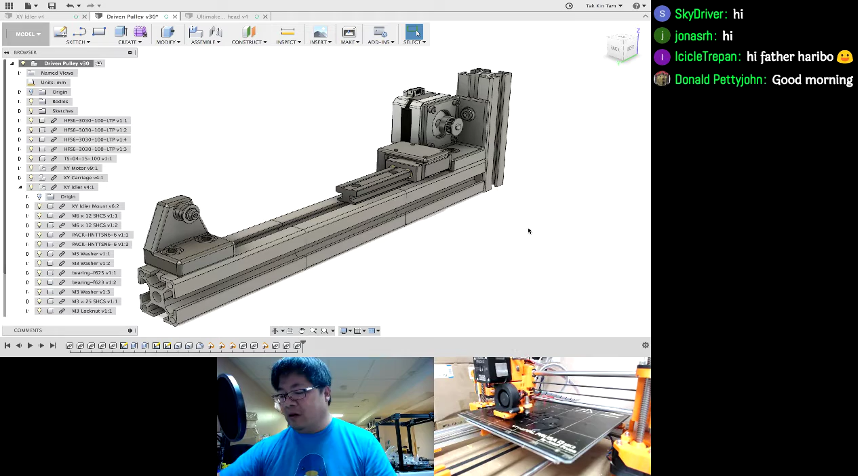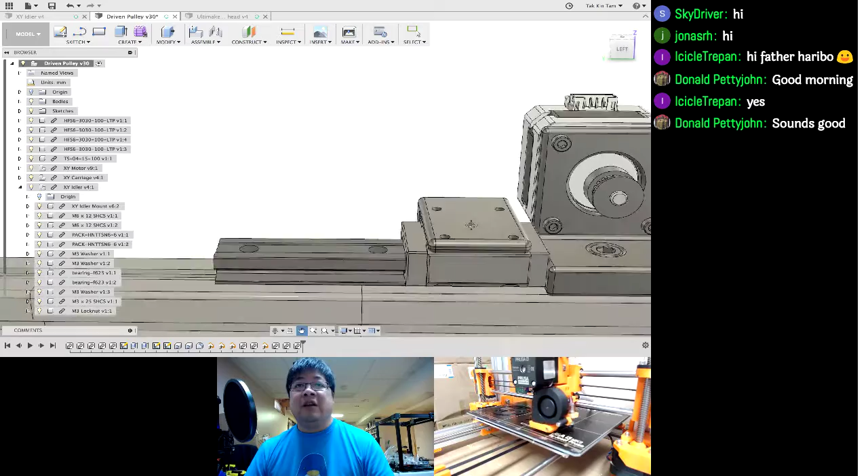So basically, nothing really big changed since the last time we streamed, just to catch everybody up to speed. Last stream we were talking about this motor mount here. We were basically going with a linear rail with the rod mount, the 10 millimeter rod mount coming out of the side here.

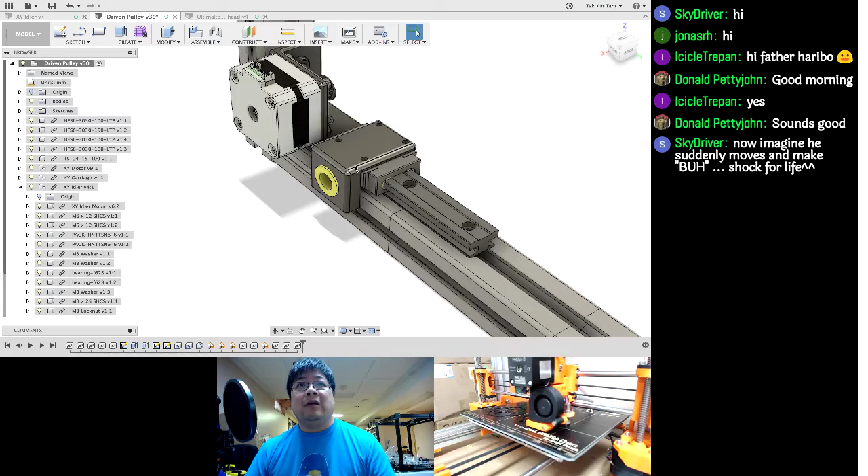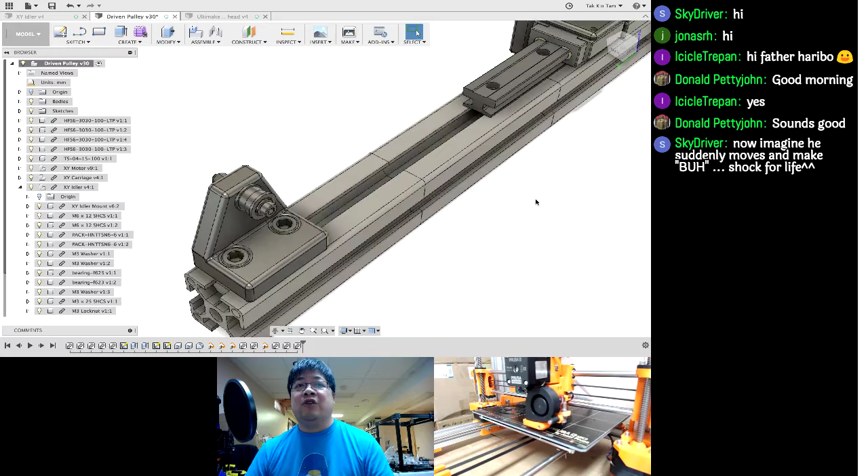We reviewed the usage of this motor mount in the last stream, and we needed an idler for the other end, so I finished the idler this morning. This is the idler design, simple basically, because from this side of the extrusion it's going to return the belt back to the motor. I still have to work on the belt mount for the carriage itself, which will happen today.

What's nice about this is that you could see it is a self-contained unit. You could take this whole extrusion, build the idler and the motor mount and the rails, before you bolt the assembly itself. So you could do all the tensioning and all the work off the frame, and not have to deal with trying to work around certain things.

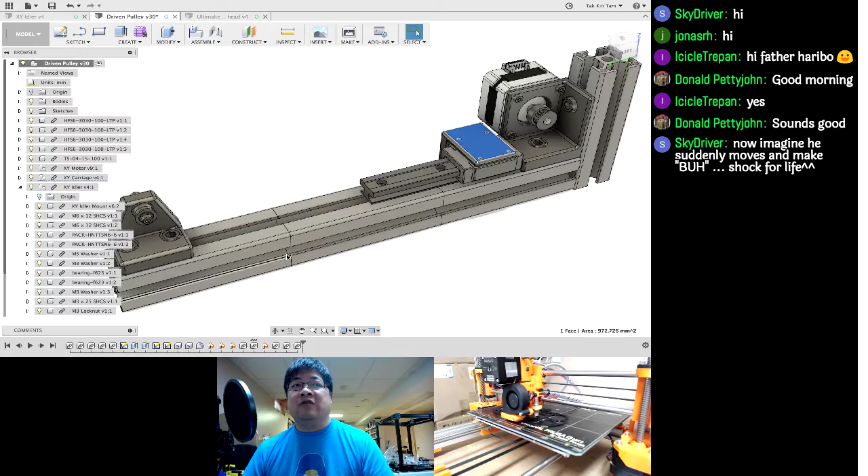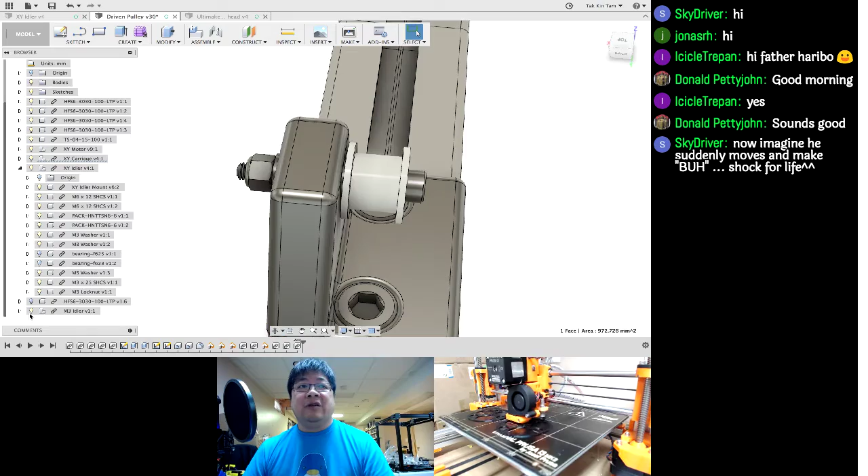The idler is designed for two flange bearings. You have the option of not using the flange bearings and going with a regular M3 idler, that works as well. But I personally like using the flange bearings because it gives you a little bit more freedom, and the movement is a little smoother. So I tend to use two flange bearings in that spot.

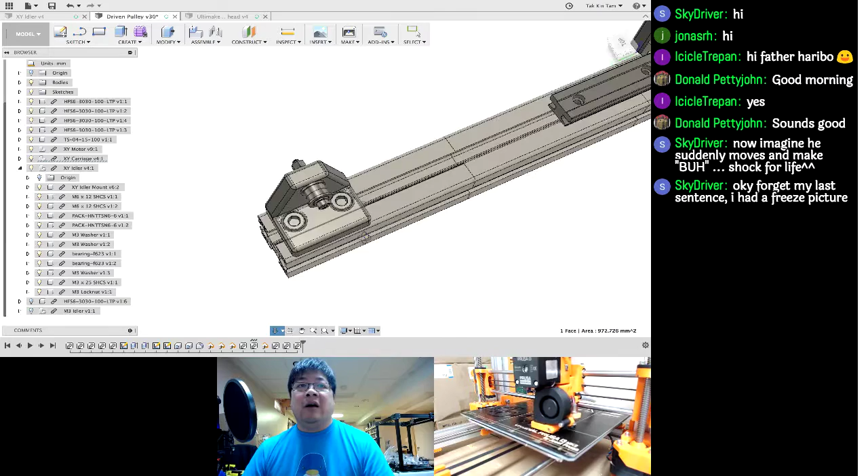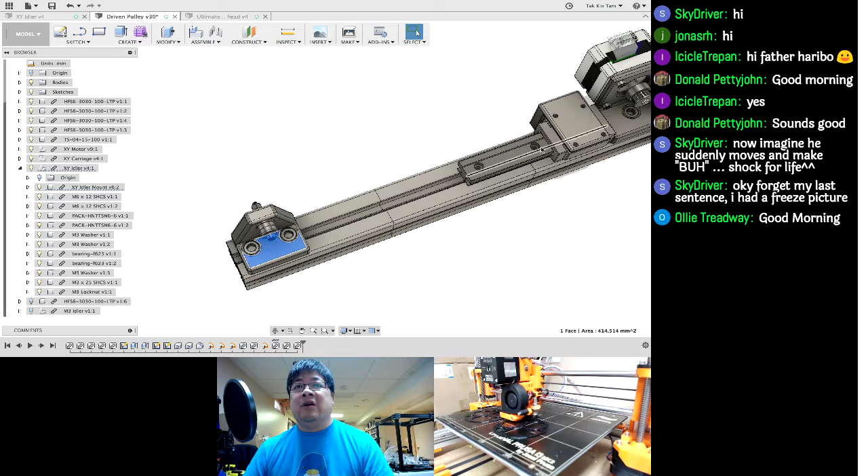The idler itself is, I would say, 35 millimeter long. We're leaving a 5 mil gap behind the idler so that you can move it back to tension the belt. So basically, the belt holder on the carriage itself is going to be a straight through belt holder, it's not gonna have any tensioning mechanism. The tensioning is going to be done by moving the idler along the extrusion track here to get the proper tension.

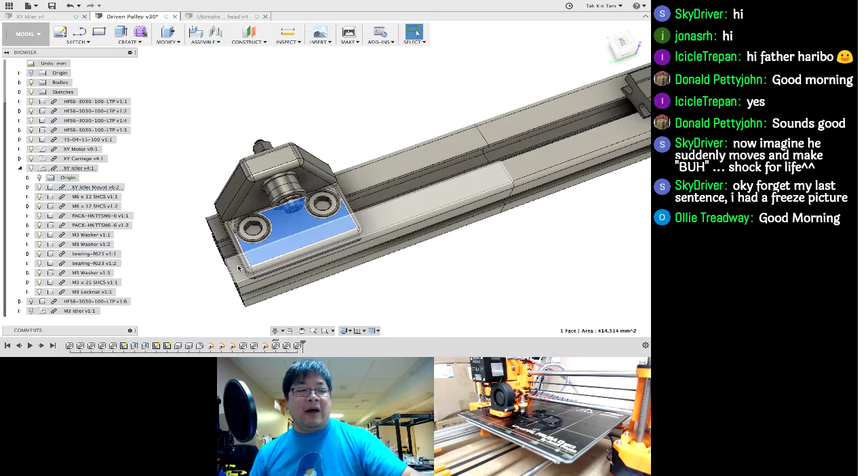Because the 5 mil, that's normally a GT2 belt - if I have one here, a normal GT2 belt, each tooth is about 2 millimeters in each step of the belt. So 5 millimeter is going to give you 2.5 teeth of adjustment. So you have the option of going with a little less, but then you lose the travel of the Y carriage itself.

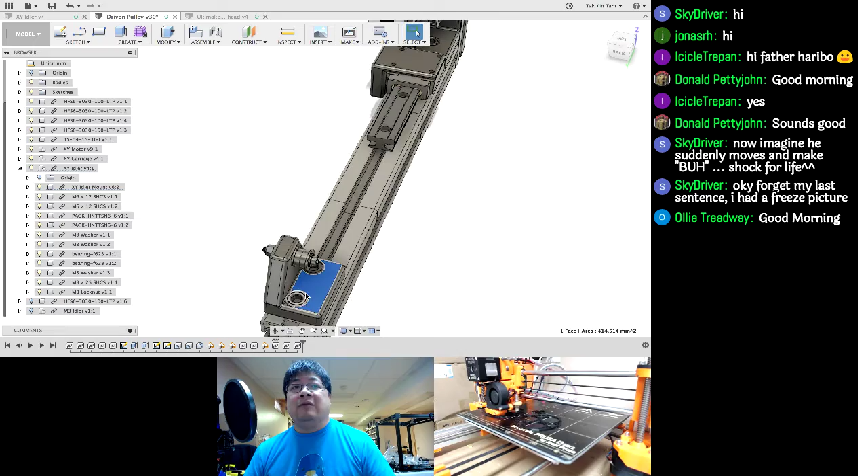So it doesn't take long. I mean, what you do is you go and tighten up the belt and move the tension back. So it should be pretty good, 5 mil should be more than enough adjustment range for that.

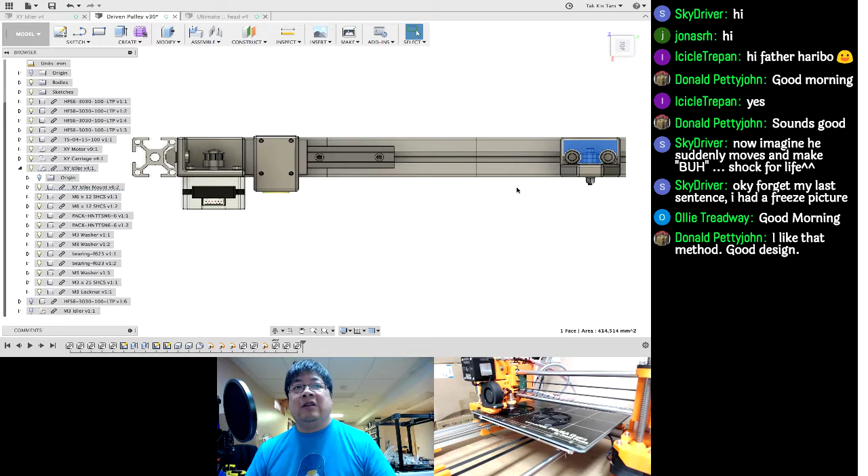So let me get the top view here. You can see that the top view is we're using a 30 millimeter or 32 millimeter stepper. So basically, the clearance of this area is pretty good, and the travel is going to be maximized for the entire length of this extrusion.

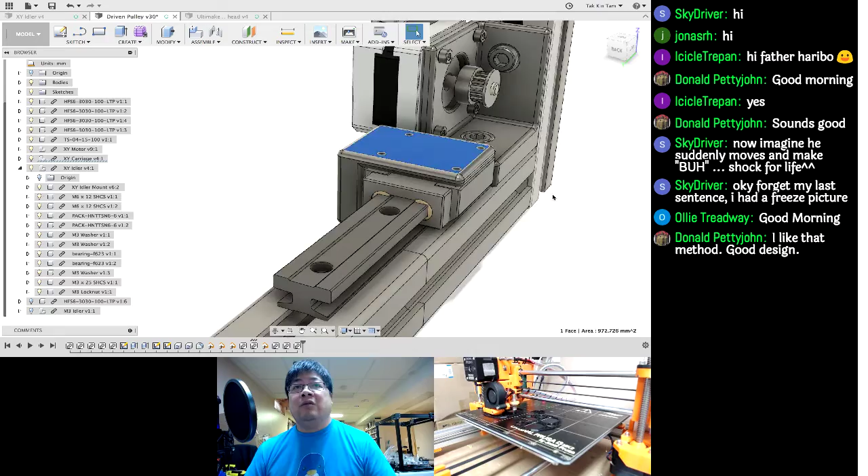So this is pretty much, I think, for now. The only piece I needed to make is the belt holder, and what's gonna also be needed, let me move it so we can see it in view.

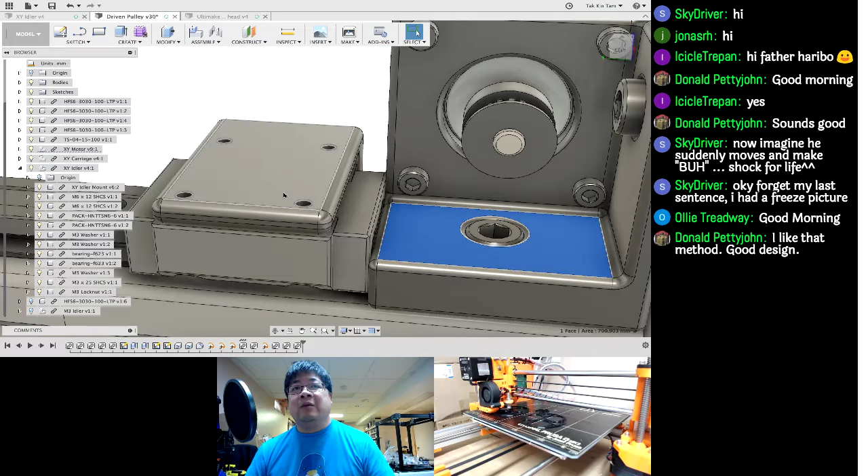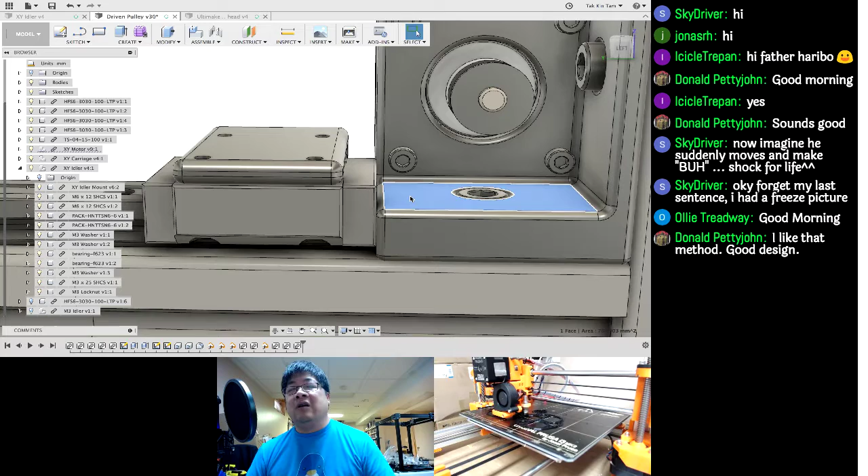What needs to go here as well is I need to extend this Y carriage mount to have a trigger arm so that I could put the end stop here. So basically, when the carriage gets to the end, it's physically going to be stopped because the carriage ends there and it's going to hit the motor mount. But I want to have it triggered before it hits the motor mount. So on the belt holder, we're gonna extend that so that the end stop sits on this edge here, and the carriage coming across is going to trigger the end stop so that it doesn't physically make contact there, hit the end stop switch.

On this side, unfortunately, we could have it, but it's more programming on the firmware to have a negative end stop for this spot, so we generally don't do that.

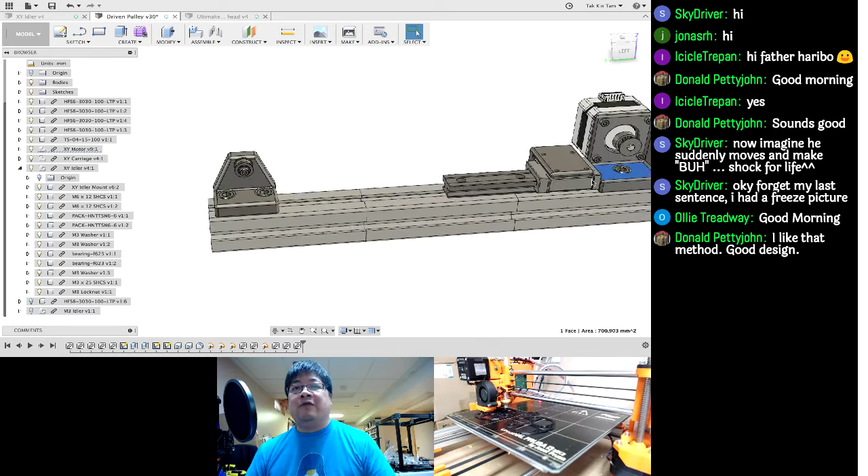What we do is after we home, we tell it what's the maximum travel, and then we have it stop slightly before this edge here. So even if you move it back to tension the belt, it will stop somewhere along this edge without hitting this mount.

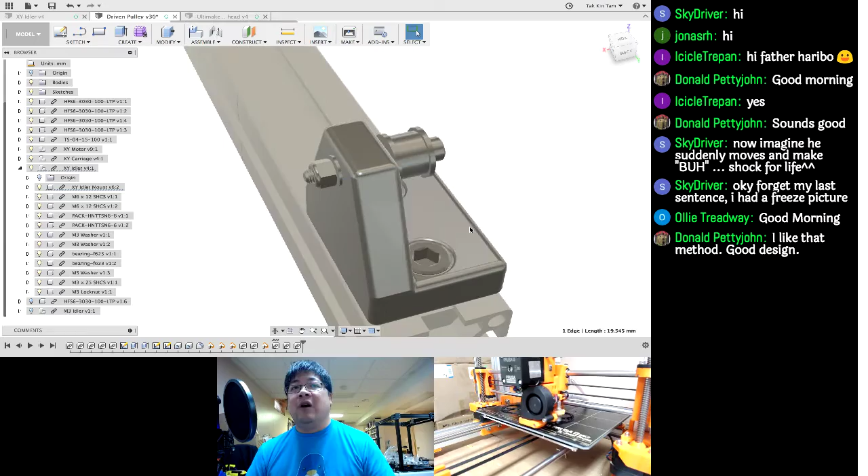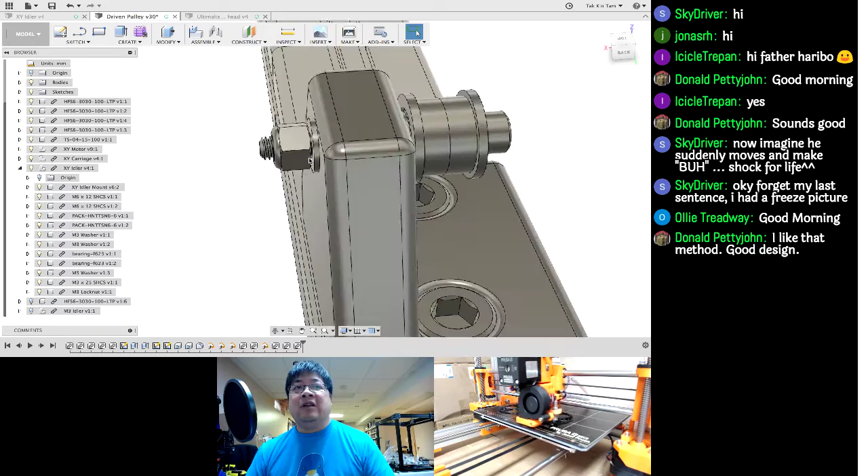Also, these parts are now designed with printing in mind. So on this side there's no nut trap, because having a nut trap made it more complex—we needed support to hold that nut trap in place, so it's exposed right there with a washer to mount it on. This edge would be the edge on the bed, so it's easily printable.

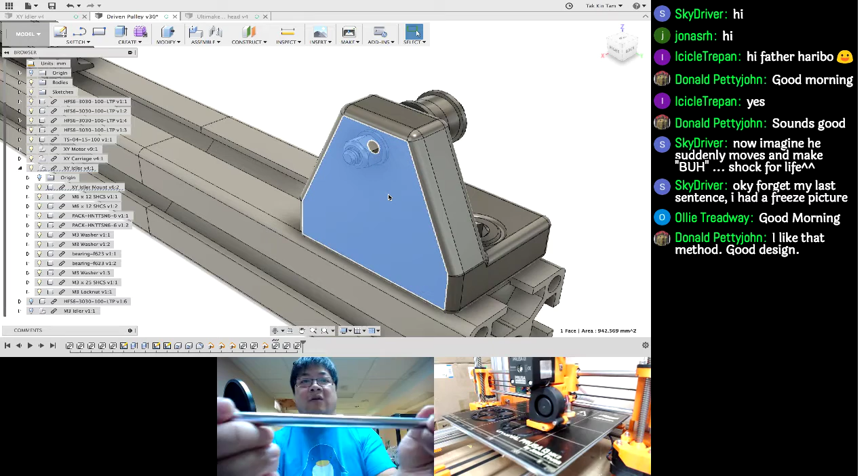This was the printed piece that came off the last print we did, and you see it goes into the Y carriage mount shown here. The 10 mil rod goes in there, and it's pretty sturdy. That's a 10 mil rod, so you can see how thick it is—there won't be any deflection in it. The spider rides on this rod, so it's pretty good. I think the design works.

These 10 mil rods I got from Misumi—I think they were like $12 for 4. This is 400 mil, so it's quite a bit longer than the ones we normally use.

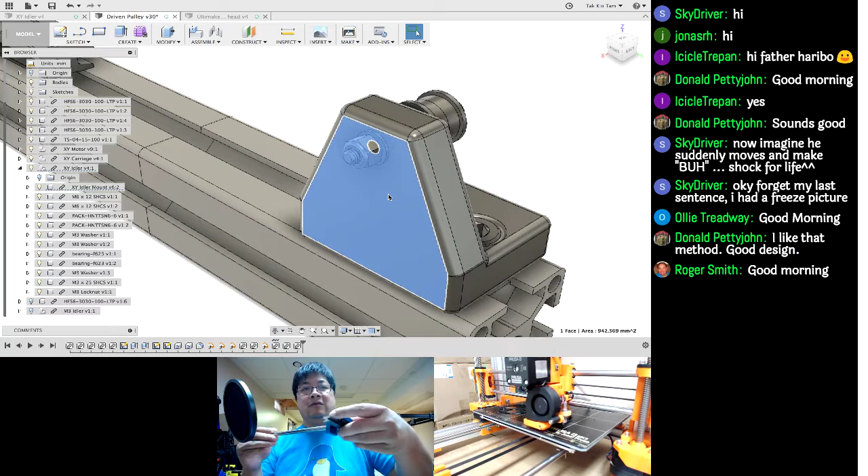It completely sort of rides along the rails there. It was looking pretty good. I think it's a lot simpler than the way Ultimaker uses the multiple rods. So I think that works.

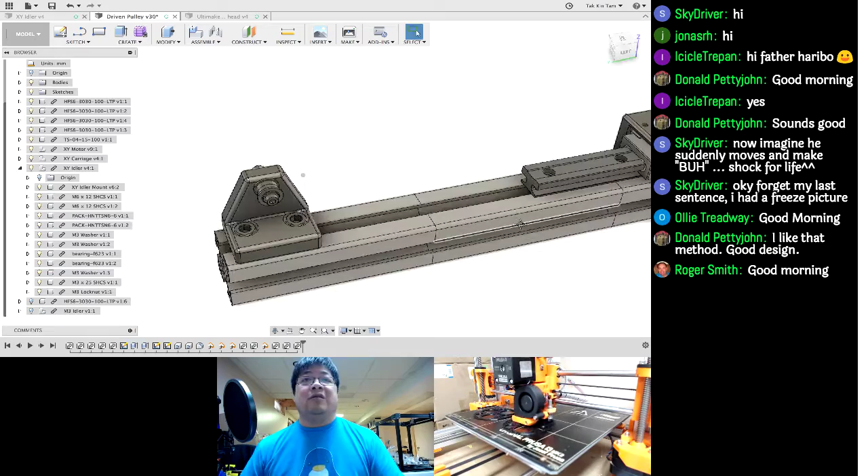By the end of this weekend, we should have this whole assembly ready to go. So if I make the belt mount, add the end stop switch to the motor mount, and then order the extrusion, rail, and carriage, we should have a working physical model next week of this kind of XY driven system.

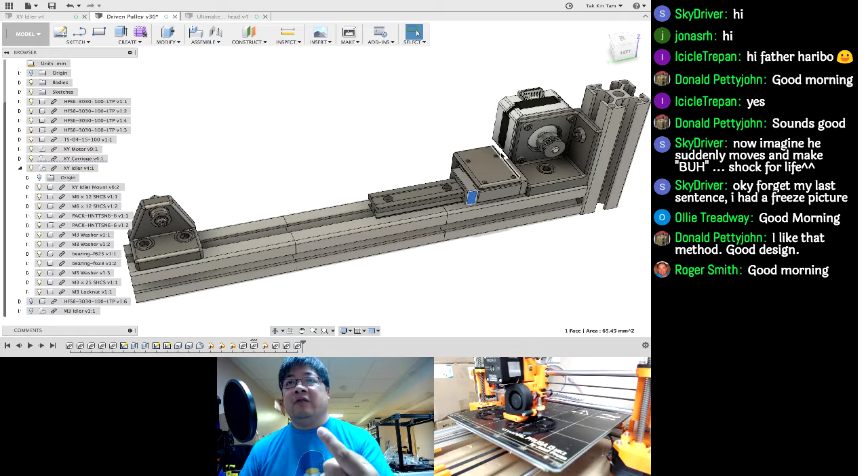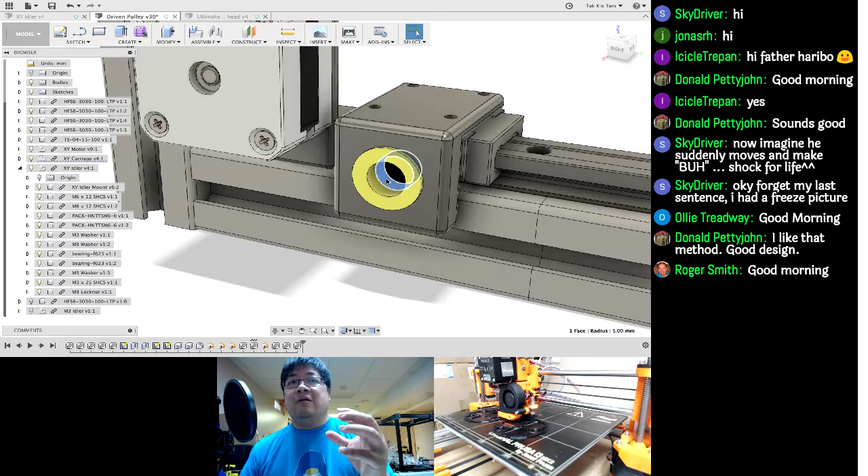Once I've built one and proven it works, getting all the clearance and stuff right, then I'll basically replicate it 3 times for the four sides, and then work on the cross rods. As I mentioned last stream, there's a sort of hack we're doing—because this is a 10 mil rod, and the outside diameter of an LM8UU is 15 millimeters, we're able to utilize the Ultimaker spider in place of building our own, so we don't have to reinvent the wheel.

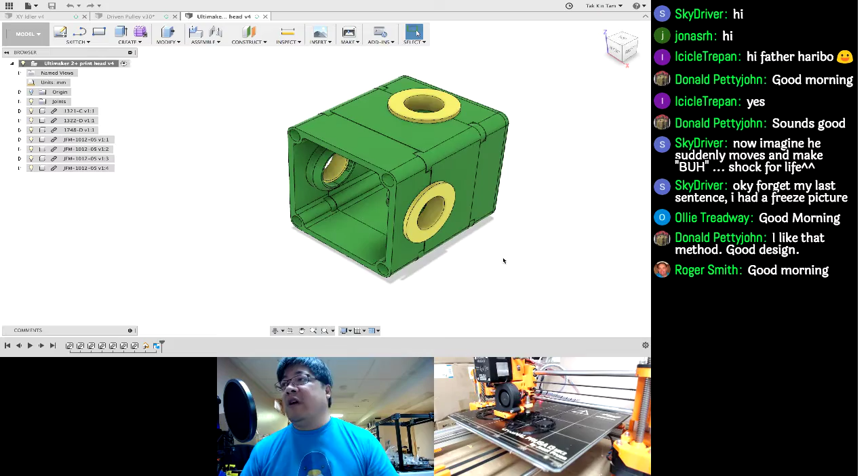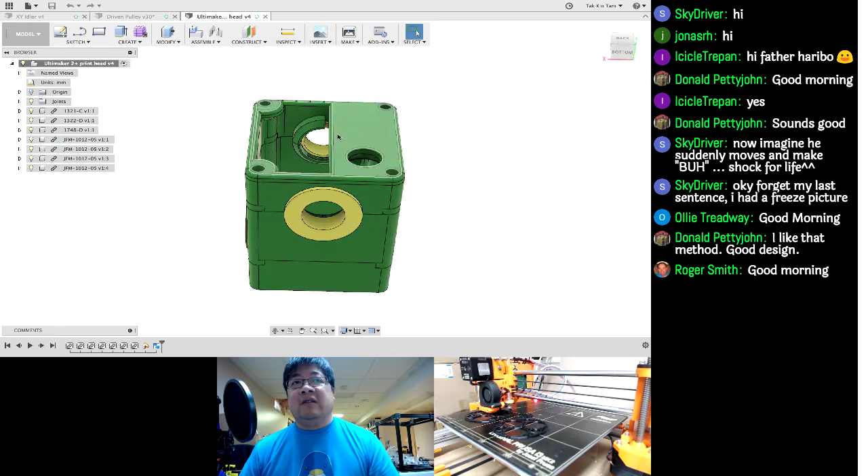So these are the step files I got off the Ultimaker 2 Plus, and on the Ultimaker 2 Plus this will be the orientation. They really have to fix this—there's really no easy way to do this. Basically, this is the top, where you'd feed the wires and the cross rod going to those bushings, and the bottom here is where you'd mount the Olsson block.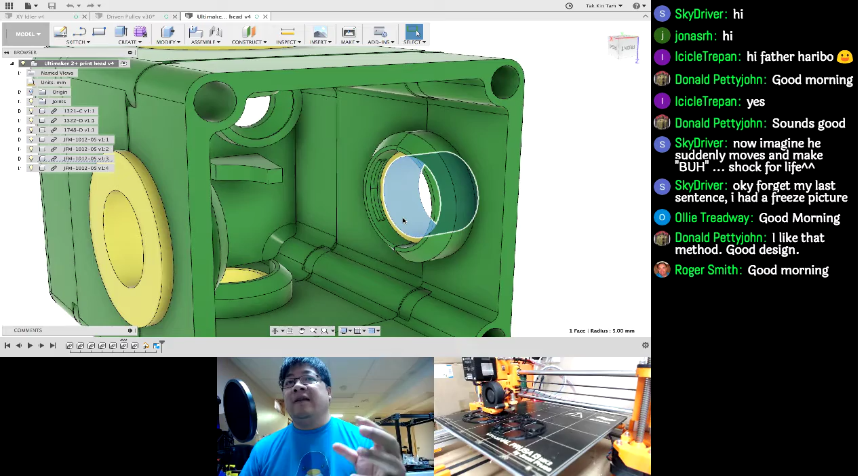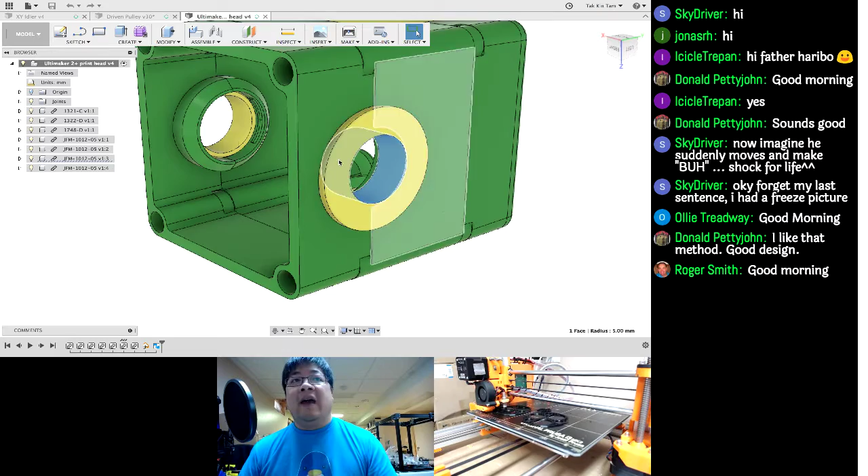So if I flip this, you can see this 12 millimeter OD, 10 millimeter ID bushing fits exactly in this hole, where normally you'd put an LM8UU or a bronze bushing across. It works in this spot. So that means I can adapt this hole to be a 10 millimeter hole, and have the cross rod come across here and the other direction.

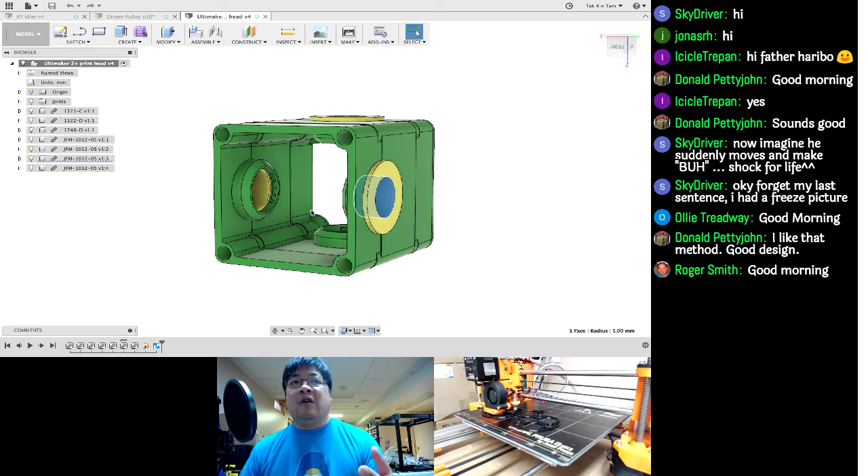So pretty much, if this proves to work, that means we don't have to build our own spider—you'd use the one from the Ultimaker, and then use all the different iterations of it, like single, dual, quad extrusion, E3D ones—all the different configurations you could use. You don't have to worry about making your own at that point; everything is already done for you. This is a good development that we're able to try. So at least for the short bid, we'll try to make it work with the Ultimaker spider, and that will save us a few weeks of mucking around with it.

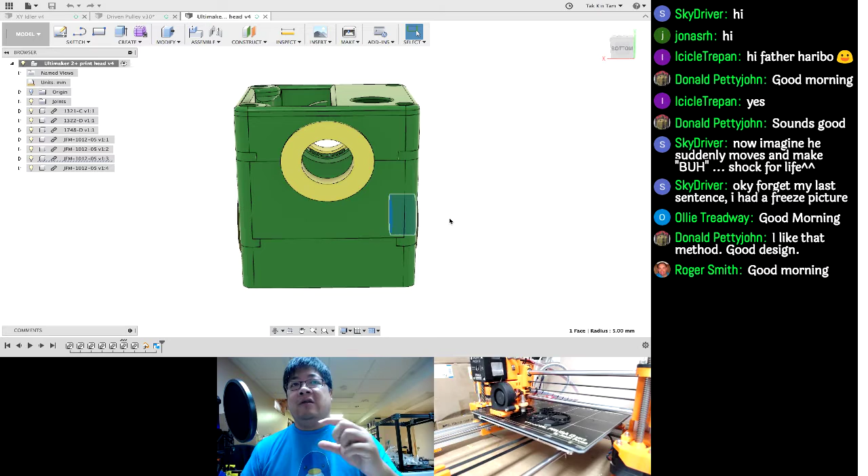In parallel, I would probably still work on a dedicated spider, but the option is given to you guys that by keeping the rod spacing between this hole and this hole at 18 millimeters, we're able to keep our options open.

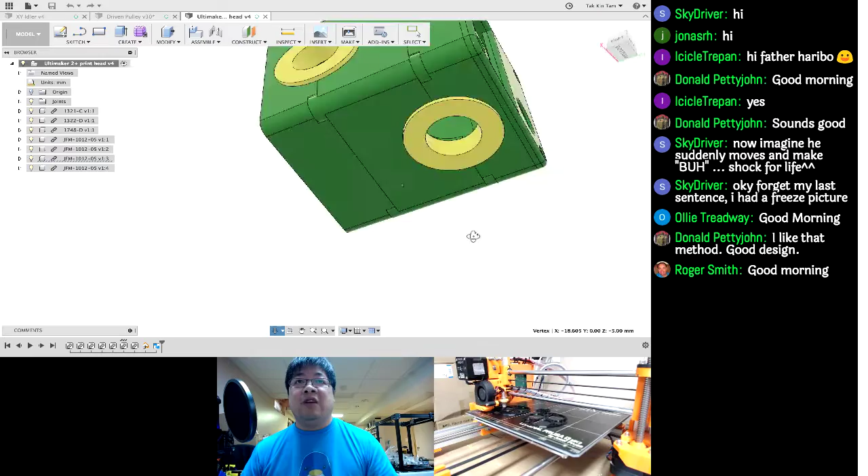So if this works or not, we're not spending too much time chasing the rabbit down. On AliExpress you can find these for like $14 injection molded, or you can find them for about $50-$60 CNC out of aluminum. So it's a good way to go either way.

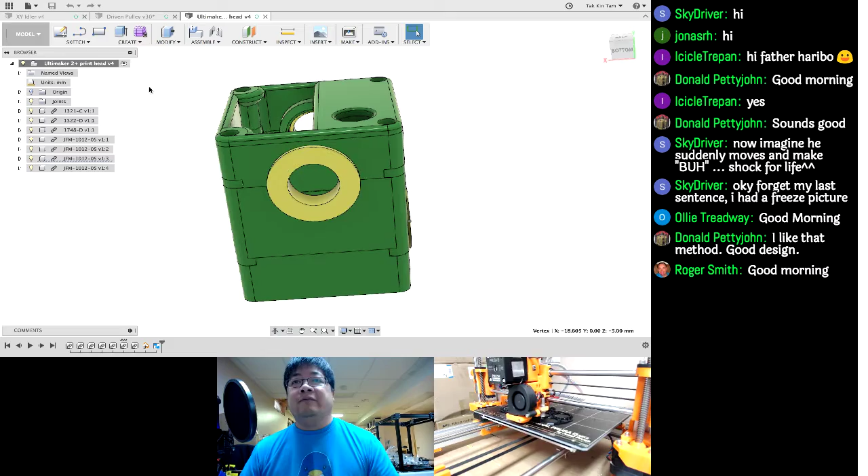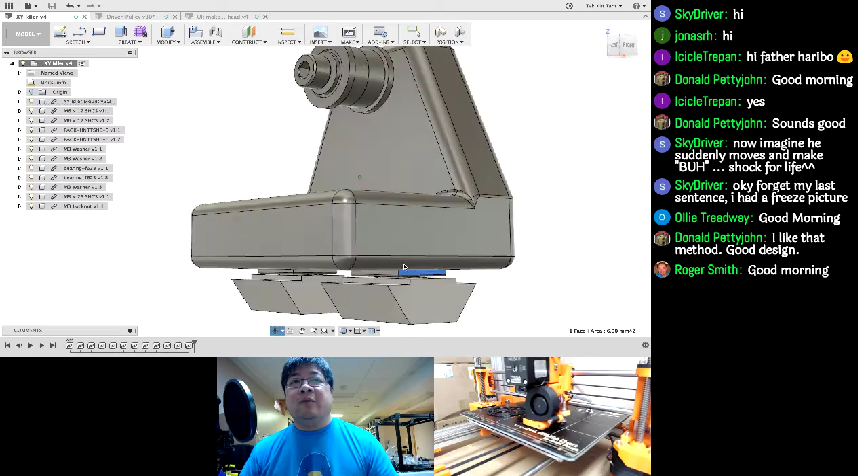This was an idler I was showing you guys before. This is the idler assembly where we put in all the hardware. You can see the alignment blocks are now integrated into the bolt hole, so they print nicely. You don't need support for these now, because the 1 millimeter is all you need to align yourself into the hole correctly, and that 1 millimeter also makes it a little bit beefier, so we're not having issues with people hulking these down.

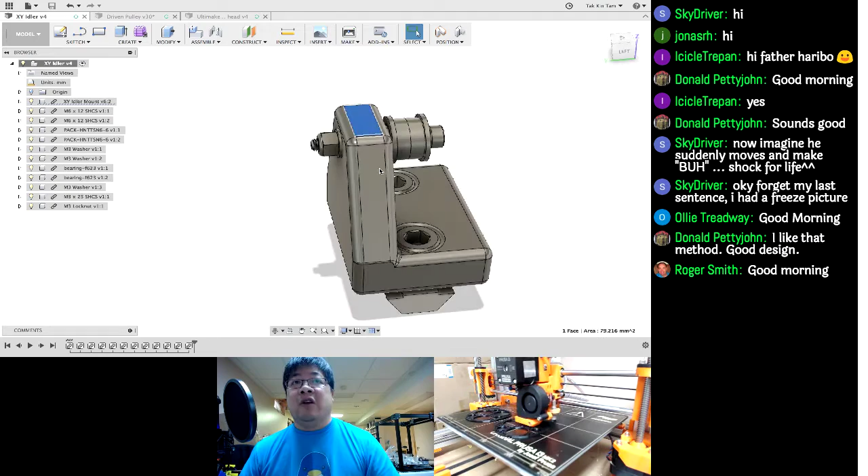So this came out pretty good. I did a loft on this, so basically I didn't have to draw most of this.

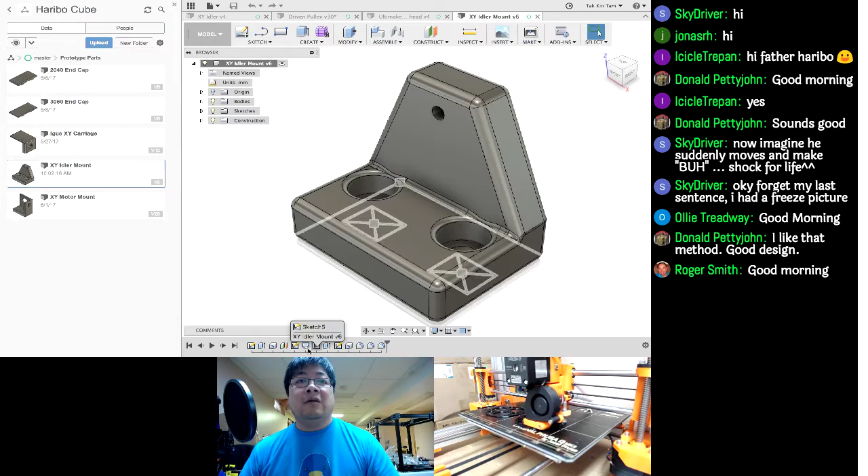It's basically a loft. I don't know if you guys have seen the loft before, let me see if I can bring it back up. So what a loft is, basically you define the base, define the top, and it'll create the sides necessary to transition from the bottom to the top profile.

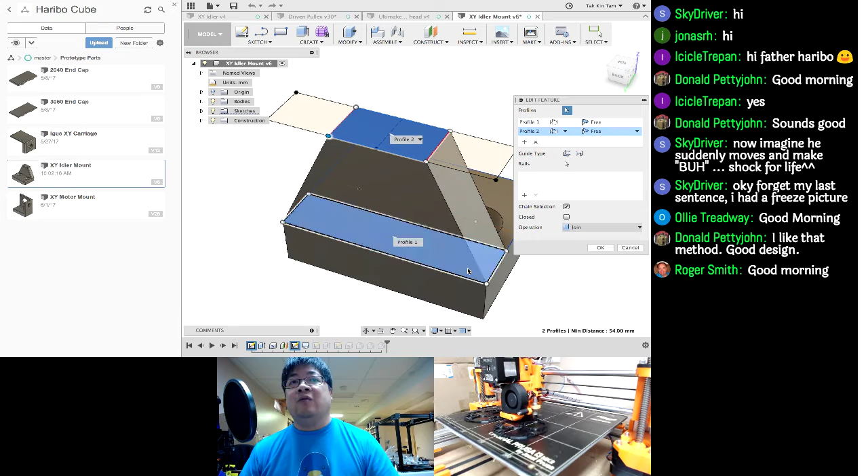You can stack as many profiles as you want, and it will draw the shape that's going to continuously connect all the profiles. By using that, I'm able to quickly adjust the height by moving the plane, and also adjust the shape so I'm not always square, which makes it an interesting shape.

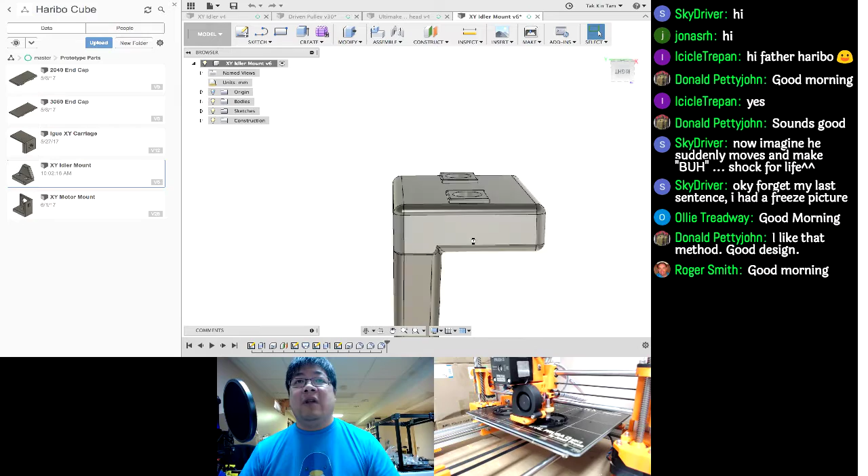So I'm gonna test print these today and see how it works out. But like I said, these alignment blocks with the bolt holes work wonderfully. They don't need support at all to print because it only comes out 1 millimeter, and there's a 0.25 millimeter fillet on it, so it brings it in pretty nicely. They don't really need a lot of support for it - you don't actually need support at all, as I say. So that was pretty good.

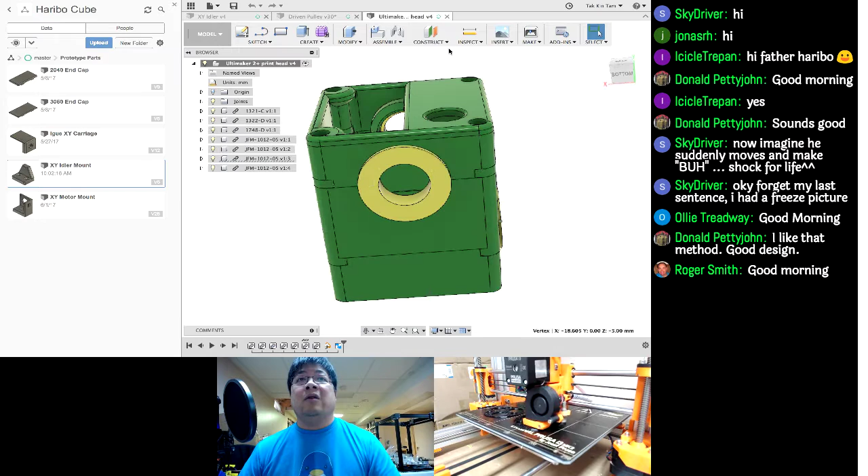We talked about this. We talked about this.

Let's save it. Okay, so that's pretty much all the parts for this week - the Igus XY carriage, the idler mount, and the motor mount for the XY.

If we're able to use the Ultimaker Spider, that completes the whole XY assembly already.

I think Patrick was having some good progress on the SmoothieWare configuration. I think he's rewiring his Haribo to use the smoothie board.

Oh yeah, hang on. So did you hear a lot of noise on this side? Because somebody's assembling a lot of the spinners that we are putting up. So they can see that now.

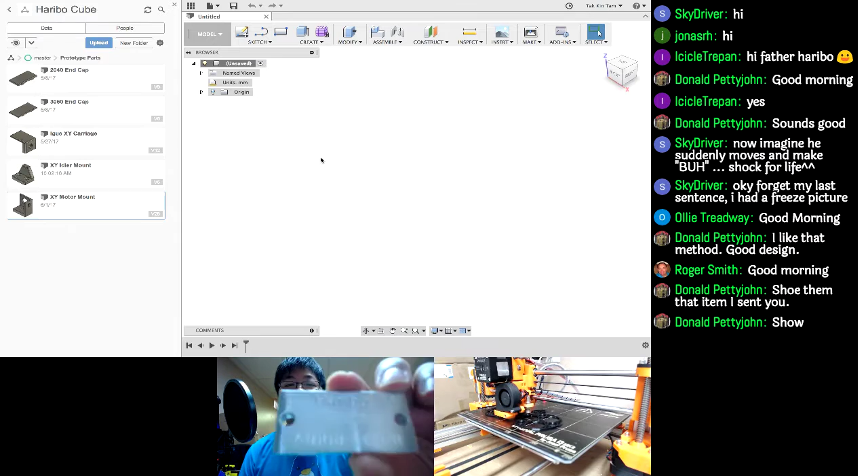I think that's better - Haribo Cube Alpha Team number 0. Donald was able to send me that. Thank you, Donald, for that.

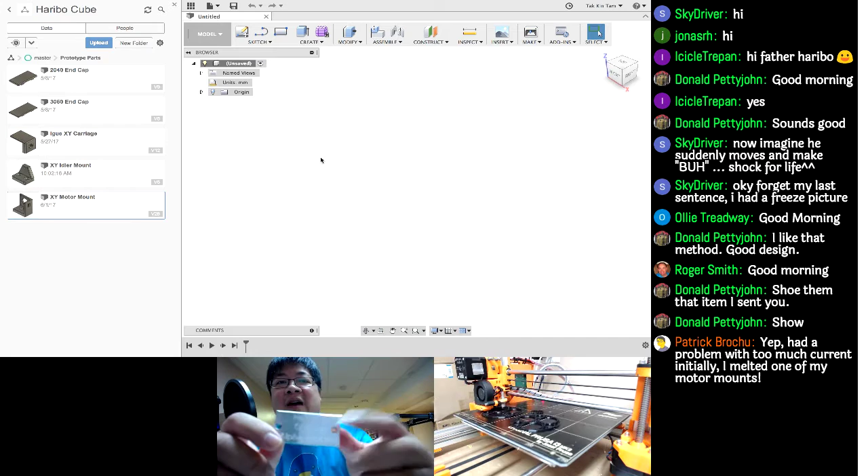Gives me a little bit of motivation to actually get the machine going so I could put the badge on it. I have the Haribo 3030 number 0 on the other printer that's printing now, the one printing the poly wheels, and this is going to be number 0 for Haribo Cube Alpha. We're going to have the badges for beta and then the one for the release.

So this is exciting. Next week I think we're making good progress - next week we're actually gonna order the parts.

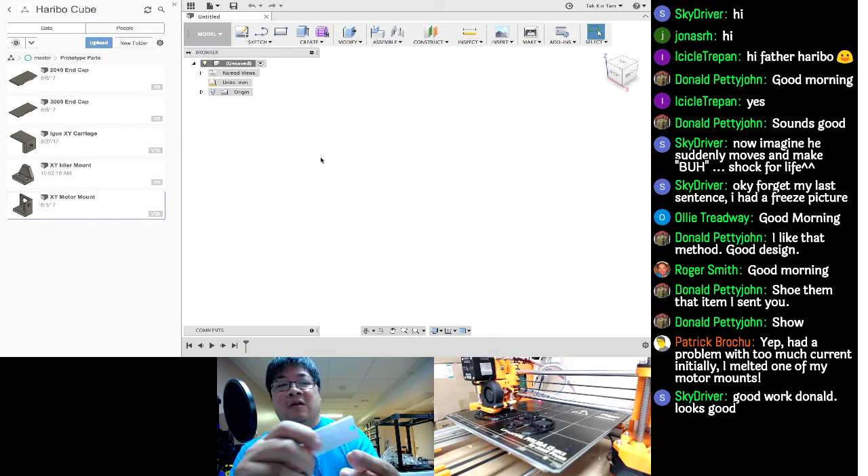I got the Azteeg X5 Mini and the X5 GT coming. The difference between the two, I think we talked about this last time, so I'm bringing it up so we actually see it while I talk about it.

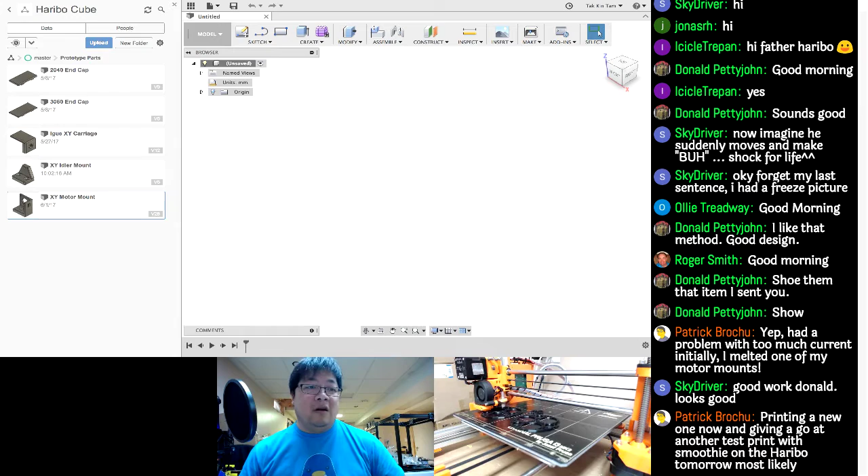Basically the difference is that one has 5 drivers and the other one has 4. So that's the major difference between the two.

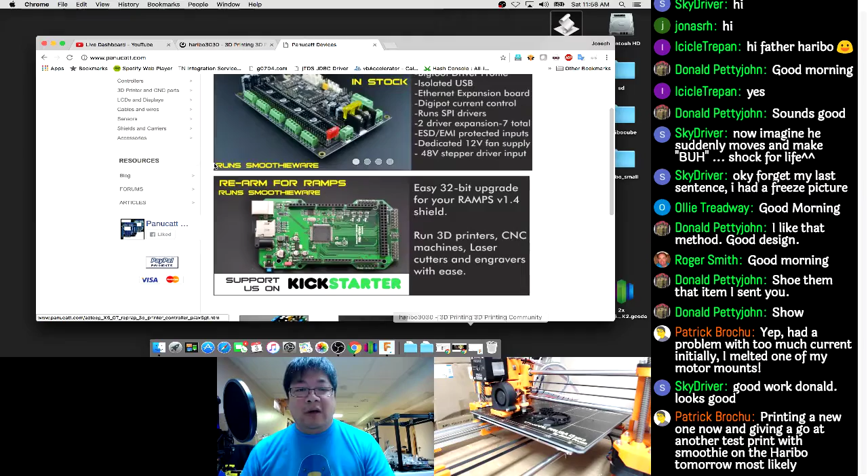So let's talk about the Mini first. This is the Mini, the X5 Mini. It has basically 4 drivers, so XYZ and E0 for the extruder, 2 dual MOSFETs, one for the heated bed and one for the hot end. It has onboard Ethernet, and Wi-Fi is optional on this one. It's a very tiny board, and you use removable drivers, so you could use the drivers from your RAMPS or whatever, or buy them from them.

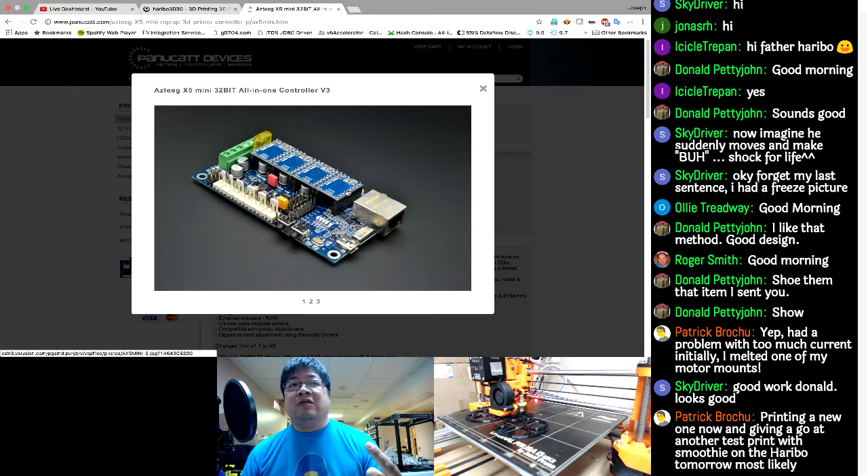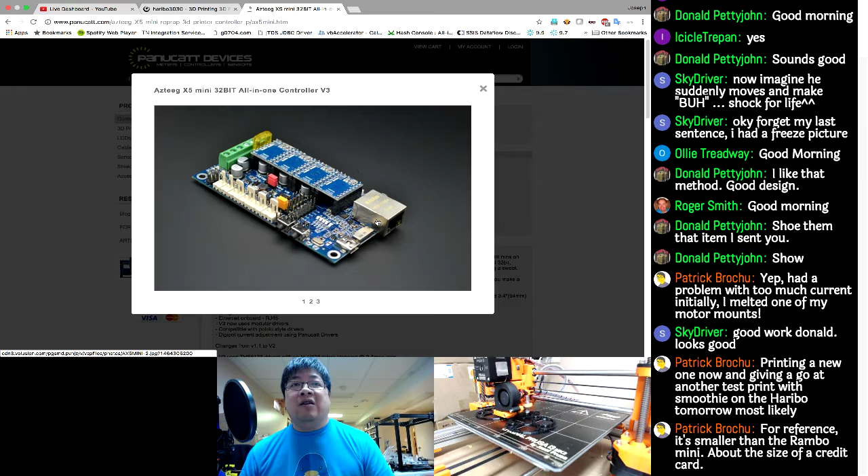I ended up buying the drivers from them. You can kind of get an idea how big it is - like if you look at this picture, that's the size of the Ethernet port. You can see it's tiny. The thing is really small.

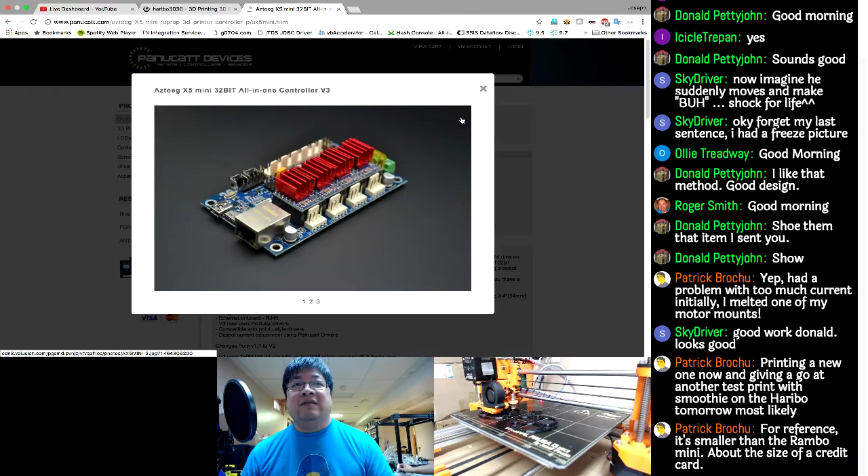The other one I got just for testing is the X5 GT. This one here, the X5 GT, gives you 5 steppers, so you're able to run an extra extruder motor, and it handles a little bit more current. Still, I think it's one hot end though, so you might have to kind of deal with that.

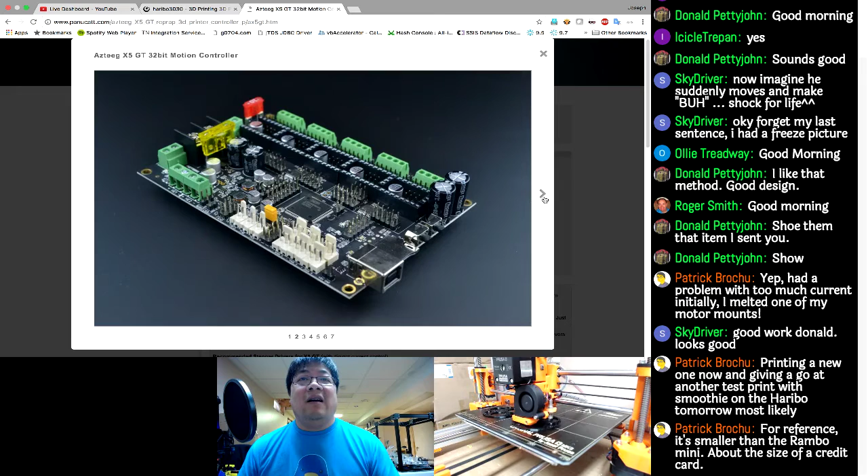Ethernet's not onboard, neither is Wi-Fi, so those are two boards you have to get separately. Actually, no - it has two hot ends. I just noticed that, hot end one, hot end two. So it supports two heaters for the hot ends, and that works pretty well.

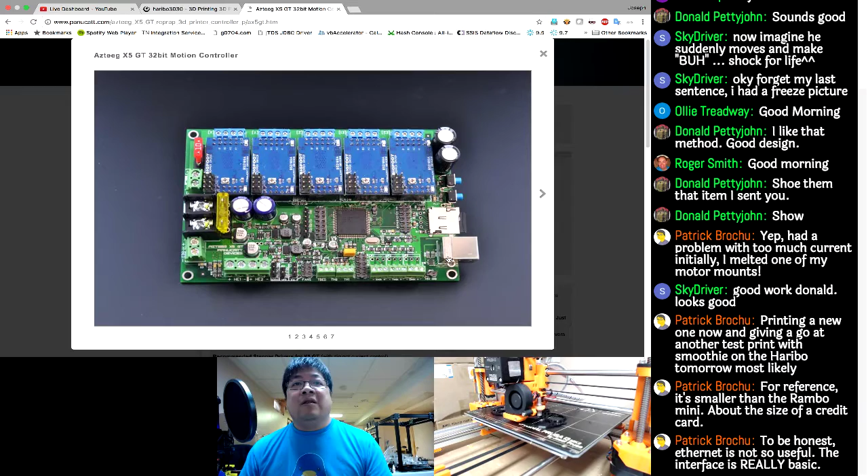For me, I'm probably not going to use the Ethernet myself. I'm still going to be printing directly from the LCD, so the SD card is from the LCD. So that wasn't really that big of a deal, but I did get the module anyway, just in case I needed it.

And I picked up the Viki 2 - I picked up two of these Viki 2 displays because I like the fact that it has the red and blue that light up, so I could glance at it and figure out what it's doing. And the full graphic display is really nice, so I ended up getting that as well.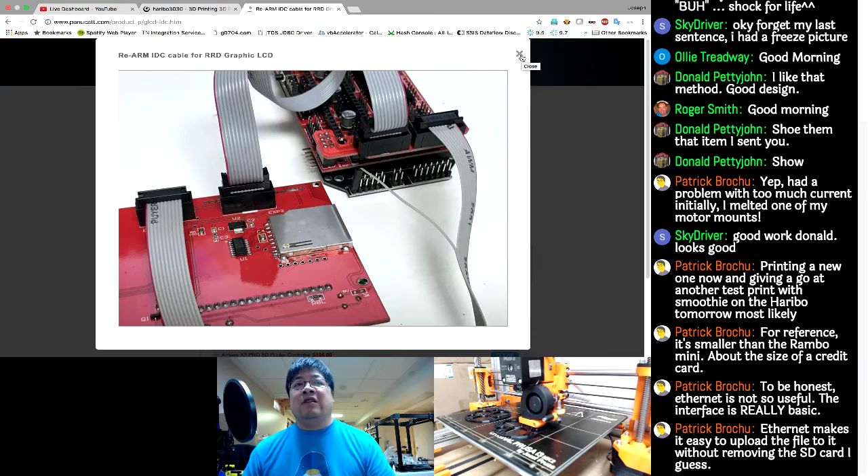I'm hoping that I have different ways of doing it, but like I said, you don't have to get - I think I mentioned this last time - you don't have to get the LCD. You could use this one, which is a $1.50 cable, and that allows you to use a cheap Chinese display. It won't use a smart one - you have to use the full graphics display. So there's two different ones. We'll test that once it gets here.

I think it ended up being 480 US for the two boards, the two displays, and then a bunch of other stuff that I got, like all the drivers and everything. Then I just got a notice on DHL - it's going to be like $80 to pay for the customs. Not really happy with that, but at least it's going to be here in like 2 days. Not sure if Patrick had to pay any customs on the order from Panucatt.

So what drivers - there's a few drivers that they were using. This is the X3, so let's look at the X5 for a second. Yeah, it's like $80, I was like, what the fuck dude, I wasn't happy about that. Guess you guys can't really read that - SD8825, based on the TI driver 8825, robust and runs cool, 1/32 micro stepping, 2.5 amp, 40 volt max, good choice for heavier motors. That's the one I went with.

Some people were using the 5984, the Allegro one, because they like it for the fast decay feature. I'm not sure - I talked to Leslie about it, and he basically recommended I get the TI one, so that's what I did.

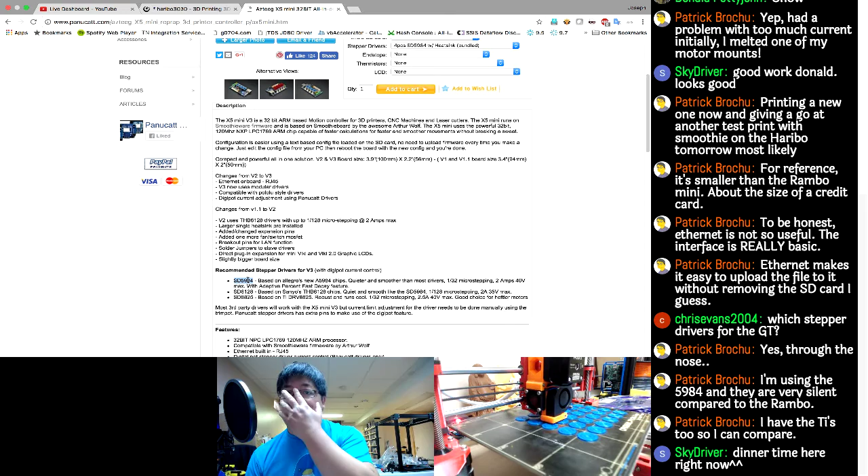What else? I'm aiming to restock the MK42 clone board by end of next week, probably Thursday or Friday. There's been a lot of demand for it. It seems like after we came up with the flatness test, there's some demand for them now, and I think the people receiving the Kickstarter and Indiegogo boards were not happy with the flatness, so they're doing a comparison and going to start going to our clone board. It's been a sudden spike, so I'm gonna have to get more of that.

Alpha - Haribo Cube Alpha. I'm going in limited to probably 5 to 10, depending on how much volume we need to test. Pretty much all the slots are filled, probably 1 or 2 spots left. I'll decide how we're gonna pick those for the testing, and I'll start sending out the BOM.

I'm working with T-Sun, Megan at T-Sun, to get the 60/60 and 30/30 extrusion cut and drilled there, as well as Misumi. Misumi is still going to be my supplier here, but T-Sun is going to handle everywhere else, like Europe and Australia, because getting from Misumi seems to be a bit of trouble for those guys, so they could get from T-Sun instead. I'll get her the specs for the Alpha, and then you guys could get it from her.

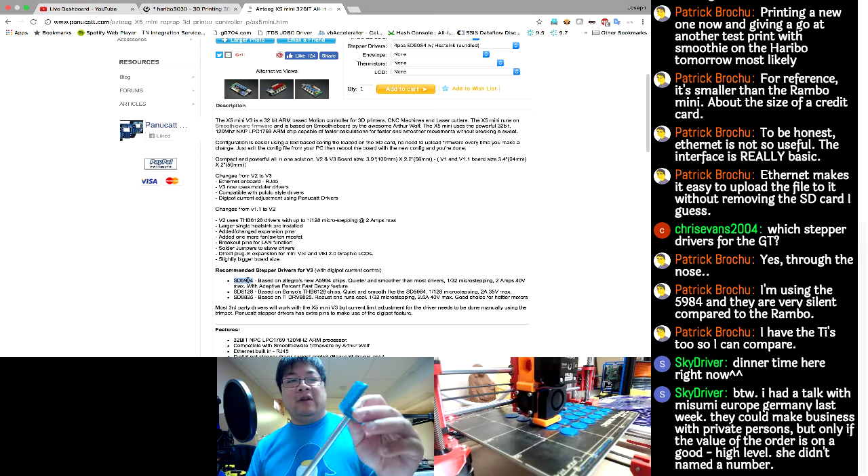I'm going to go finish up some work, print out those parts and test fit them, make sure everything is okay, and go from there. But I'm happy with the rod mount - it works out pretty good. It's in there pretty good, and the tolerances are pretty good. The PETG prints out pretty well. So I think we're making a lot of progress. I think we're doing pretty good.